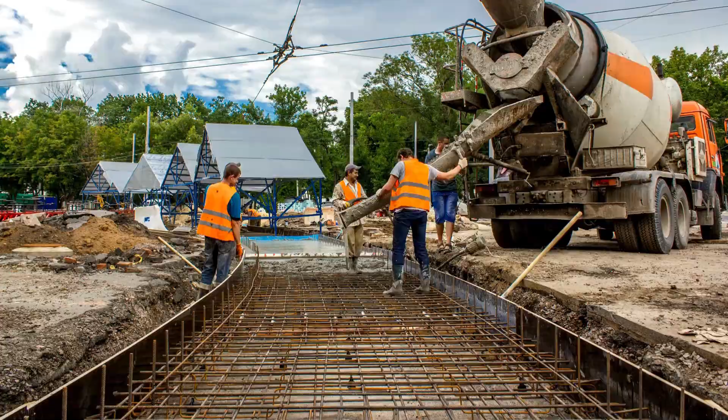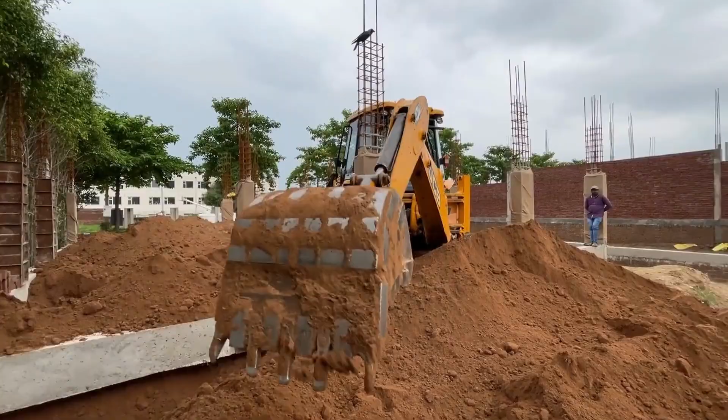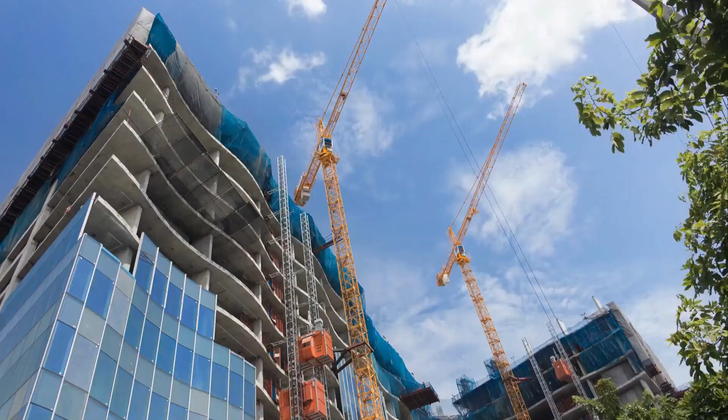Geotechnics. What is geotechnics? Geotechnics is a branch of civil engineering that studies the physical and mechanical properties of soils and rocks, as well as their behavior and response to applied loads. This discipline analyzes how soils affect structures and how their characteristics can be improved to ensure the stability and safety of constructions.

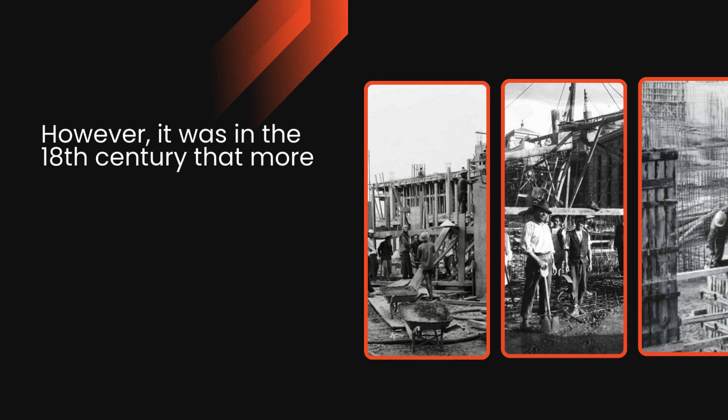Origin and evolution of geotechnics. Geotechnics has its roots in ancient times, when the ancient Egyptians and Mesopotamians built their monuments and buildings using empirical techniques based on observation and experience. However, it was in the 18th century that more rigorous studies began on the behavior of soils, with the arrival of the Industrial Revolution and the rise of infrastructure construction.

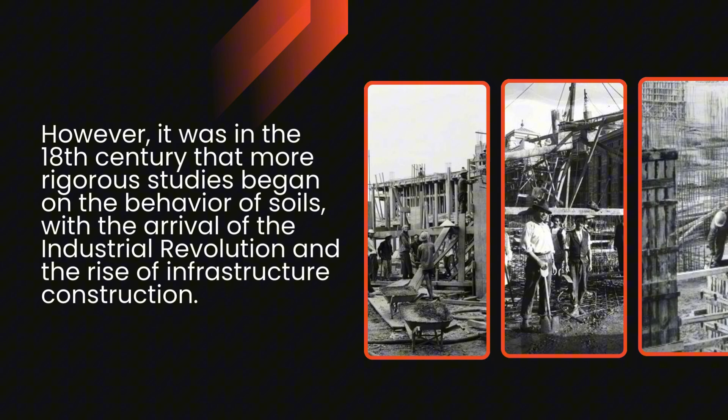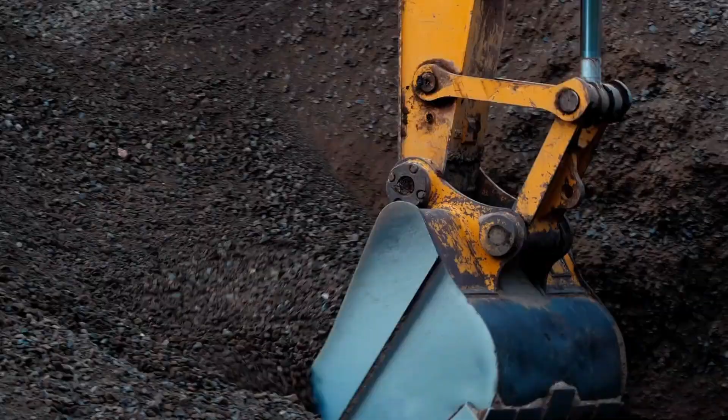Over the years, geotechnics has made great strides, thanks to the development of new soil exploration and testing technologies. This has enabled a better understanding of soil properties and has facilitated the completion of larger and more complex construction projects.

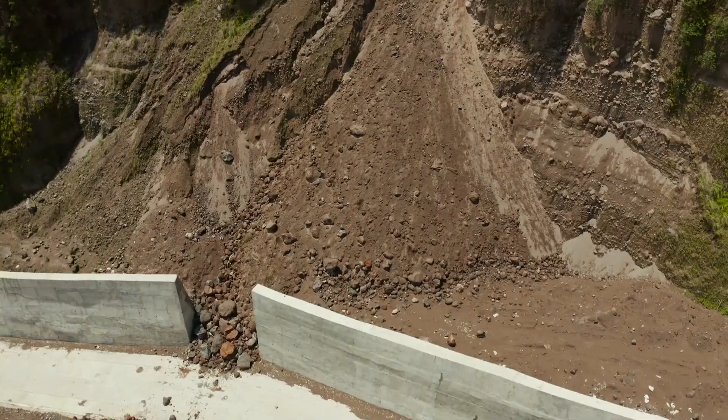The importance of geotechnics in engineering. Geotechnics plays a fundamental role in civil engineering as it provides the necessary knowledge for the design and construction of safe and durable structures. By studying soil properties, it is possible to determine the loads they can support, prevent settlements and slides, and ensure the stability of structures.

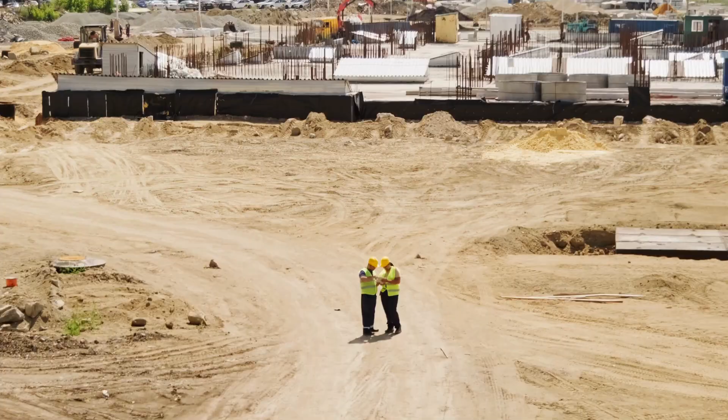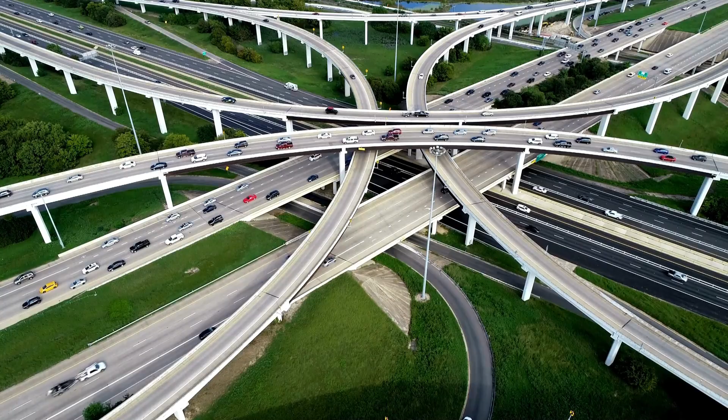Additionally, geotechnics is essential in the planning and management of infrastructure projects, as it allows for the evaluation of the feasibility of works and the conducting of environmental impact studies. It also plays an important role in sustainability, as it helps minimize the negative effects of constructions on the natural environment.

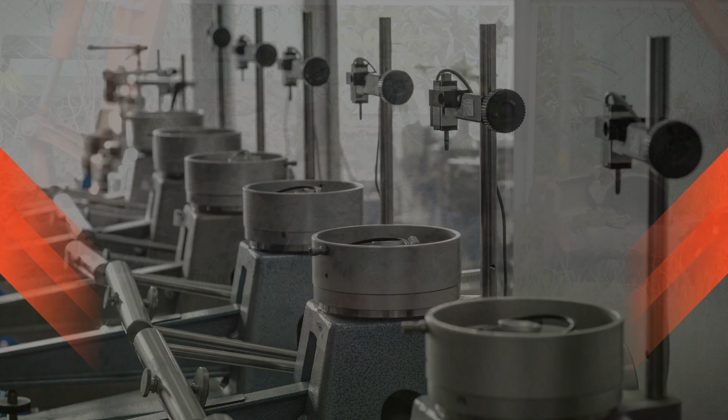Basic geotechnical concepts. Soil properties. Soils have a series of physical and mechanical properties that determine their behavior and load-bearing capacity. Some of the most important properties include granulometry, plasticity, permeability, and compressibility. These properties are determined through laboratory tests and allow the classification of soils into different categories or types.

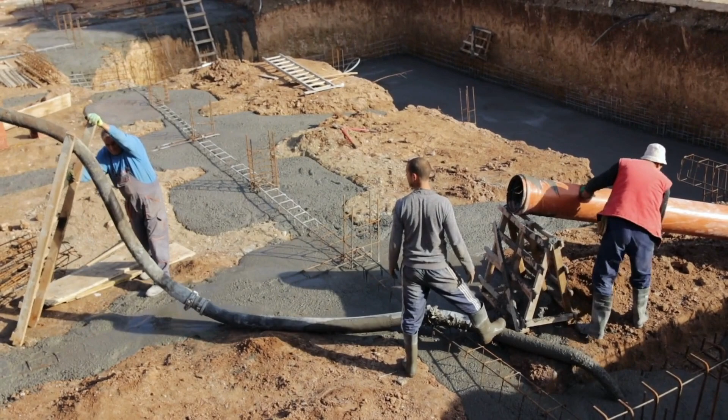Soil behavior under load. Soils can undergo deformations and settlements when a load is applied. The behavior of soils under load depends on their stress state, density, moisture content, and composition. This information is crucial for the design of foundations and structures.

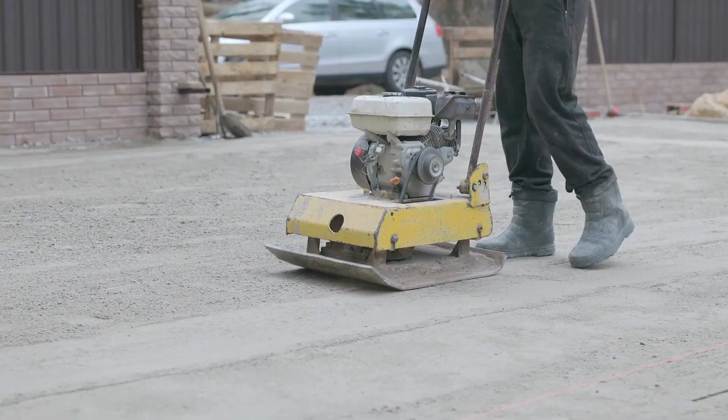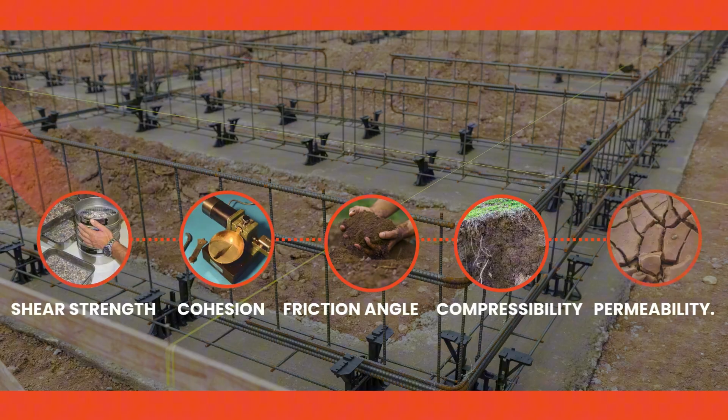Main geotechnical parameters. Geotechnical parameters are values used to characterize and represent soil behavior. Some of the most important parameters include shear strength, cohesion, friction angle, compressibility, and permeability. These parameters are determined through laboratory tests and in situ tests.

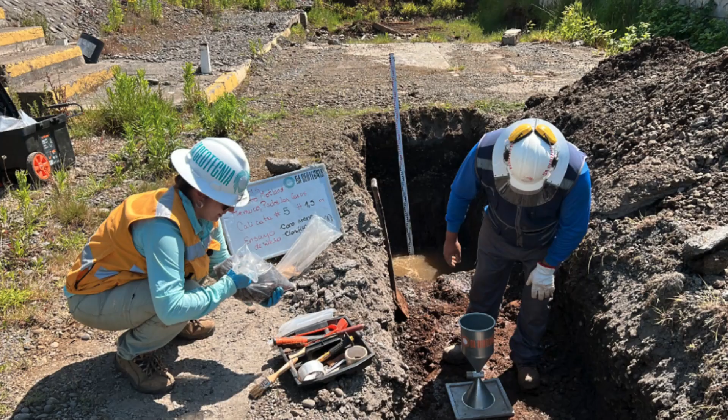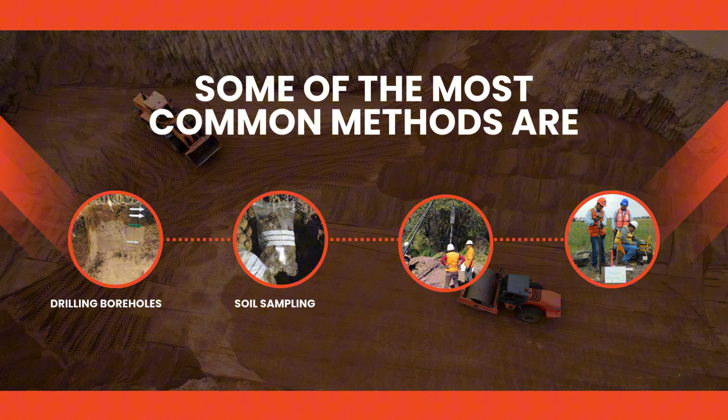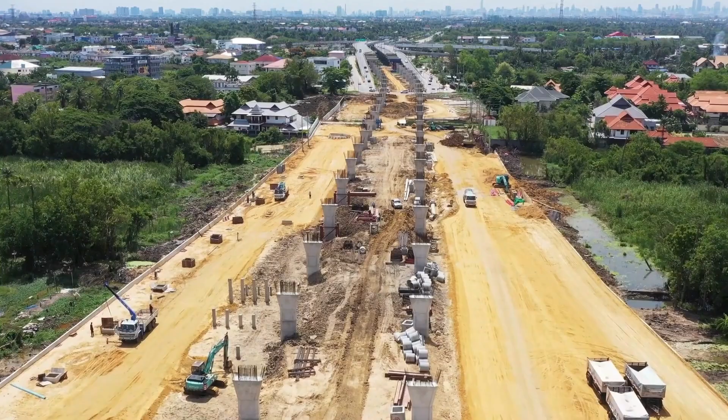Geotechnical investigation. Subsurface exploration methods. Geotechnical investigation is carried out through different subsurface exploration methods. Some of the most common methods are drilling boreholes, soil sampling, conducting in situ tests, and using geophysical techniques. These methods allow for obtaining information about the terrain's characteristics and its behavior under load.

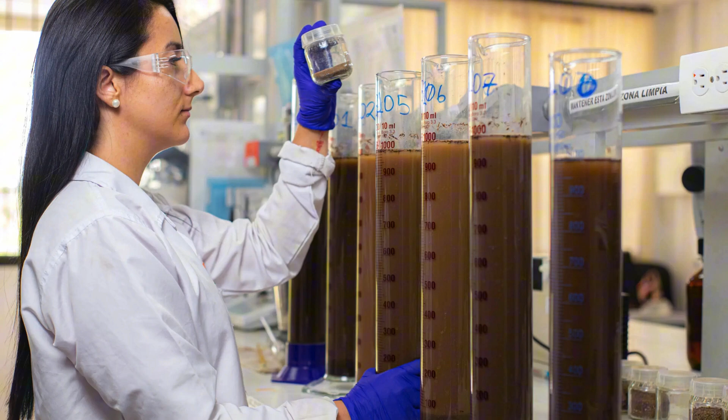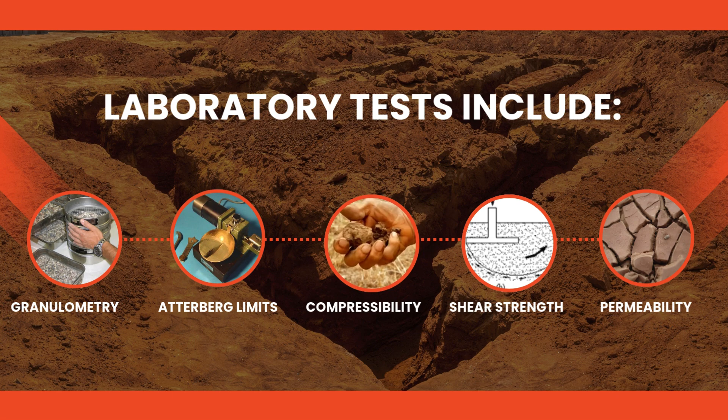Soil sample analysis. Once soil samples are collected, they are analyzed in the laboratory to determine their geotechnical properties. Laboratory tests include granulometry, Atterberg limits, compressibility, shear strength, permeability, and others. These analyses allow for the classification of soils and the acquisition of the parameters necessary for the design of works.

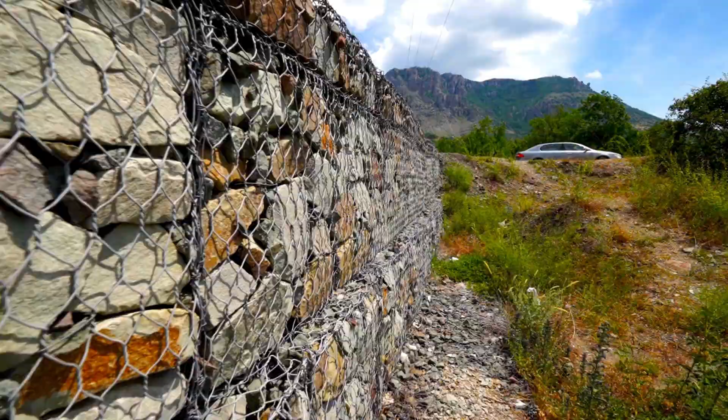Interpretation of geotechnical results. Once the geotechnical investigation is completed and test results are obtained, the next step is interpretation. This involves analyzing the obtained values and determining the characteristics of the terrain, such as load-bearing capacity, slope stability, or permeability. These results are essential for the design and construction of projects.